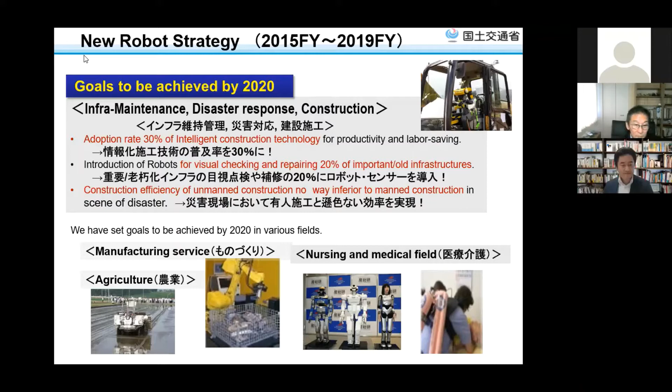In the new robot strategy, disaster response, inspection of infrastructures, and construction are set as 3 priority areas. Regarding disaster response, there are high expectations for the application of robots to activities under conditions where people are exposed to the threat of danger, such as earthquakes, volcanoes, floods, and landslides.

Unmanned construction has already been put into practical use. It is realized by machine control based on video communication technology and 3D blueprints. In addition, the introduction of robots in disaster fields, such as floods and volcanoes, is one of our priority areas.

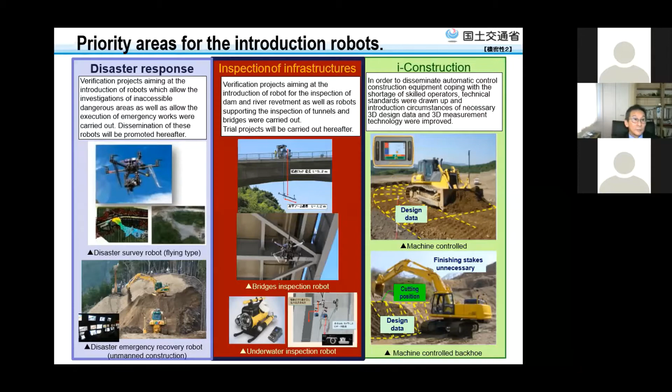As concrete goals to achieve this, for inspection robots, we will utilize robots for 20% of important infrastructure inspections. And for disaster response robots, we have set the target to realize construction efficiency which is not inferior compared to manned construction.

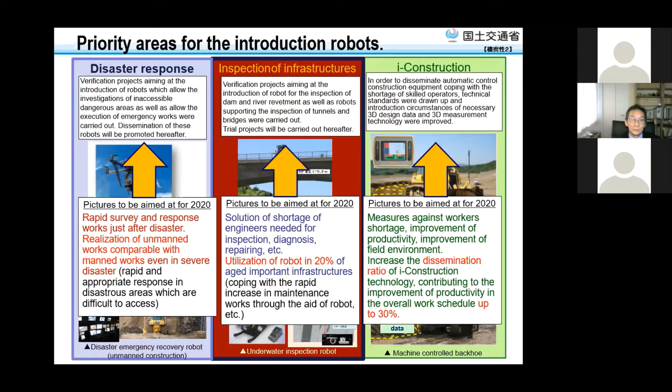The background to MLIT's strong promotion of the introduction of robots into public works projects is the existence of issues such as Japan being a disaster-prone country and labor shortage due to the aging of society. Furthermore, in order to overcome the labor shortage in the construction industry, there is an urgent need to improve the productivity and safety of construction work.

In particular, Japan is one of the most earthquake-prone countries in the world. There are 4 large plates around the Japanese archipelago. Many plate-type earthquakes occur, and volcanic activity is active.

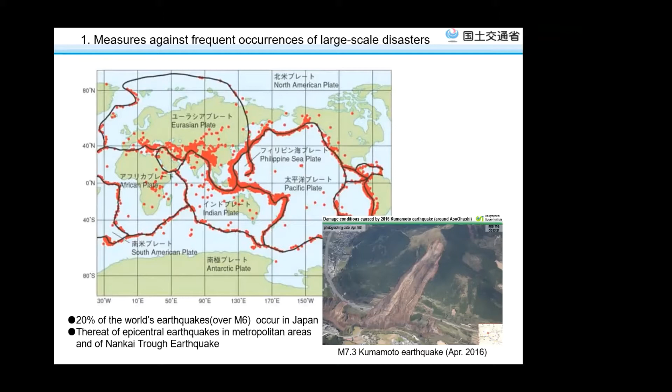The introduction of full-fledged unmanned construction technologies began with the restoration project after the volcanic eruption of Mount Unzen-Fugen in Kyushu in 1991.

During the eruption disaster, the removal of sediment that becomes a source of debris flows was urgently needed in the danger zone that might be reached by pyroclastic flows with a speed of over 100 km/h. For stone removal and erosion control works such as dozing, soil gathering, excavating, loading, and transportation, a technology was developed that implements construction by remote controlling heavy machine equipment with GPS using wireless communication.

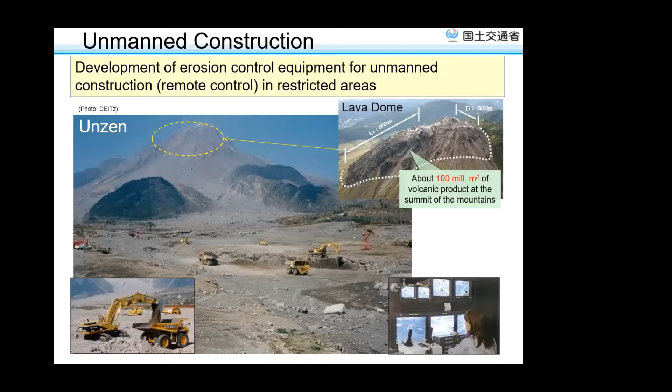Thanks to the decision to adopt these technologies, we could achieve the excavation of channels, the construction of concrete debris barriers, and installation of steel slits, all without human entering the construction site. Not only could we reduce the risk of debris flows and pyroclastic flows, but construction companies and equipment manufacturers could also gather experience and know-how, and unmanned construction technology progressed greatly.

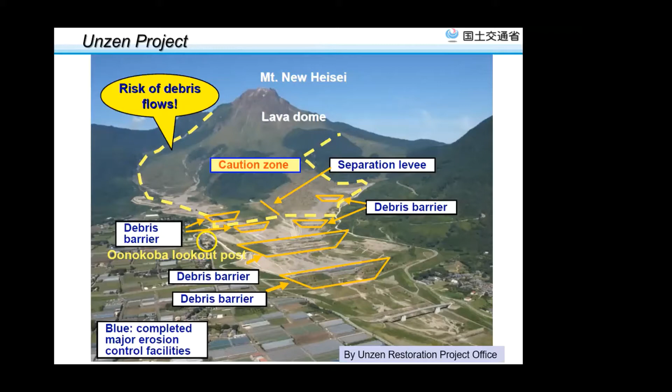At first, we started with radio control bulldozers, but now it has become possible to work from control rooms, which are more than 30 kilometers away from the construction site.

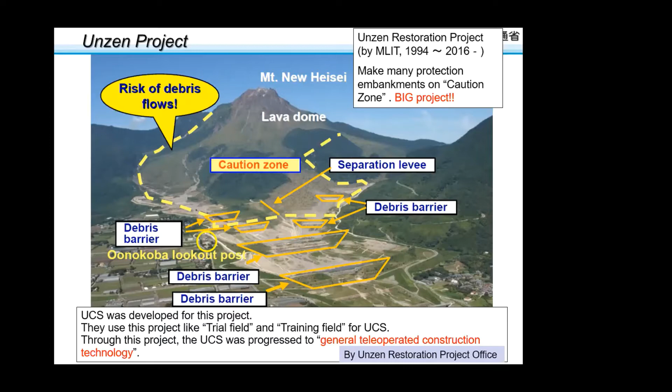Now, I want to give you a short introduction about UCS, Unmanned Construction System, with the most simple direct operation method. The operator conducts remote control at close range by direct visual observation. Operation distance is limited to a range of about 50 meters, at which visual observation is possible. This we call the first generation.

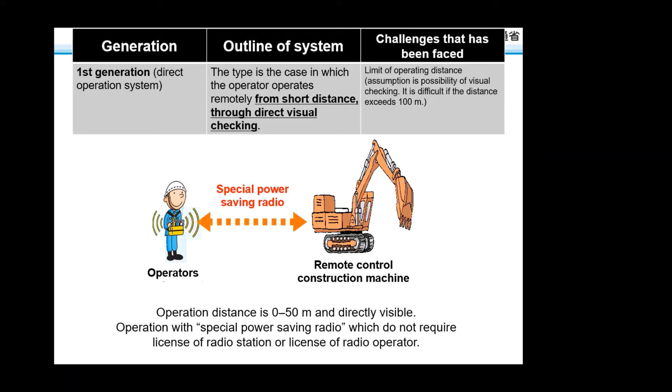The second generation is a method using a camera image, generally for a range of less than 300 meters. If you use a radio relay vehicle, you can conduct remote control up to a range of about 600 meters.

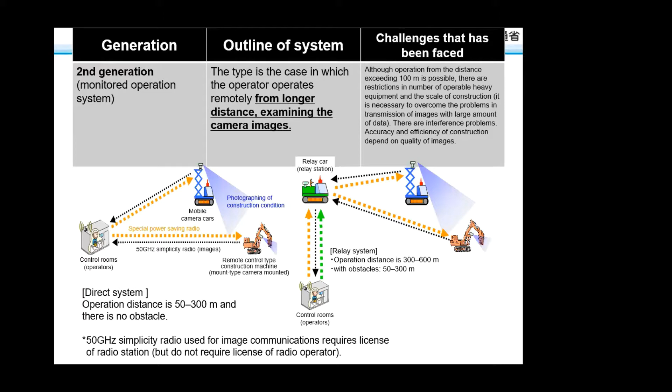Roller compacted concrete method, a leveling and compacting method using rollers, was introduced to build concrete dams with molds using gravel.

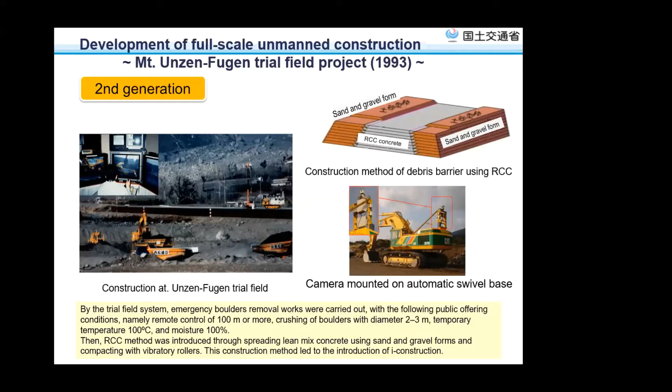In the Hakusan erosion control project, debris barrier construction work was conducted using a 50-ton suspension crane. All the construction work, such as earthwork, the setting up of the cylindrical mold block, concrete placing, compaction, and construction joint processing, were conducted by remote control.

Unmanned construction with the ISM method, in situ mixing method, which utilizes the gravel available on the construction site, was also conducted.

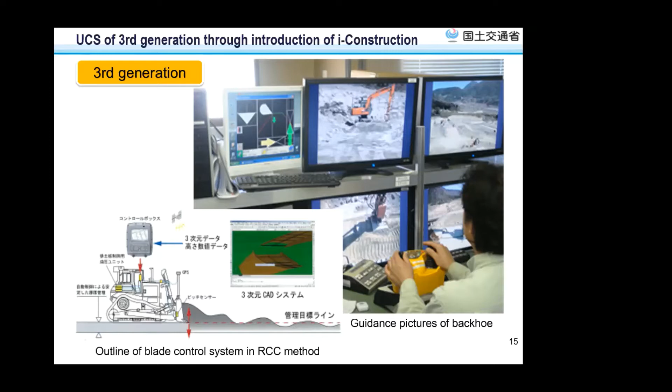With the third generation, we improve work efficiency by introducing machine guidance and machine control using design data.

UCS have evolved through actual disaster response since the volcanic eruption of Mount Usu in 2000. Their application in urban areas has been required, and remote construction from a long distance of more than 1 kilometer has become possible.

Since 2000, reconstruction work with greater accuracy has been realized thanks to progress of surveying technology, such as GPS, the piling of concrete blocks, and the construction of debris barriers using cylindrical molds.

In addition, since 2005, with the introduction of informatization construction, machine control has been used, and the efficiency of high precision construction has made further progress.

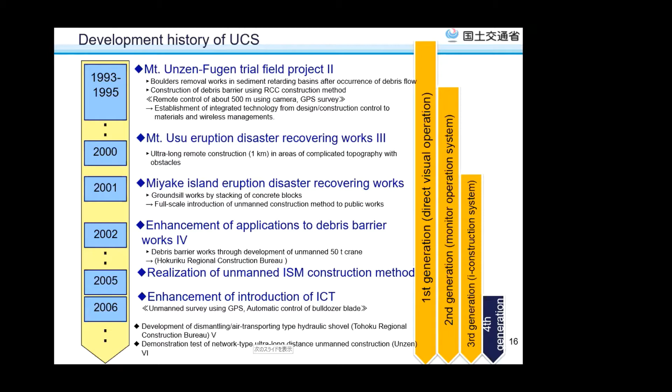With a fourth generation, by compressing and exchanging high volumes of high-definition image data through a communication network, remote control from ultra-long distance, more than 30 kilometers, has become possible.

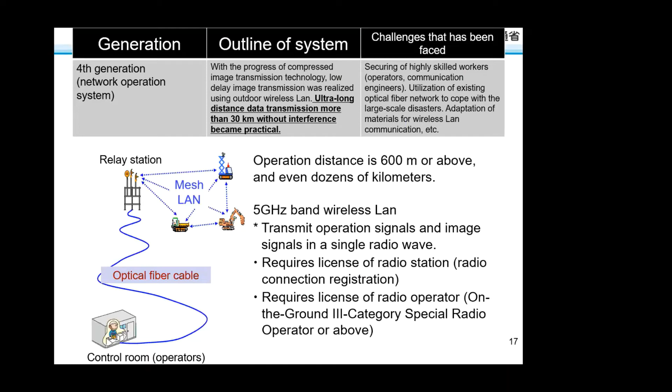Network type UCS was put to practical use through on-site validation at Mount Unzen in 2011. The installation of operation was carried out quickly in just 1 hour.

During this experiment, in addition to optical cable communication over the distance of 80 kilometers, a variety of communication methods such as satellite, mobile phone, TV radio waves, and long-range wireless LAN were applied.

Fourth generation UCS is said to be the future construction technology that utilizes information network and ICT. This picture shows UCS was introduced for work to remove the unstable debris at the top of part of a deep-seated landslide that had occurred in Nara Prefecture.

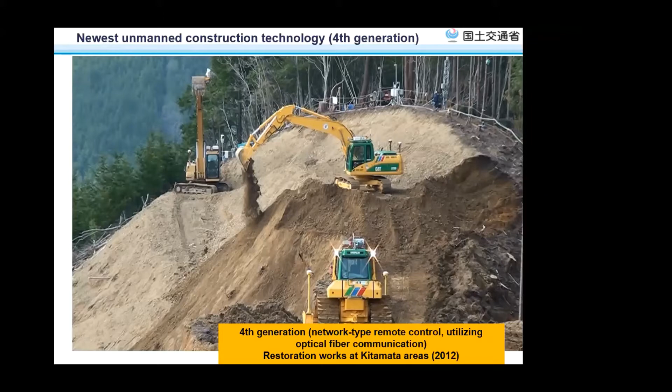From the operating room to the place near the site, optical fiber has been laid, and video and machine control data is communicated via wireless LAN.

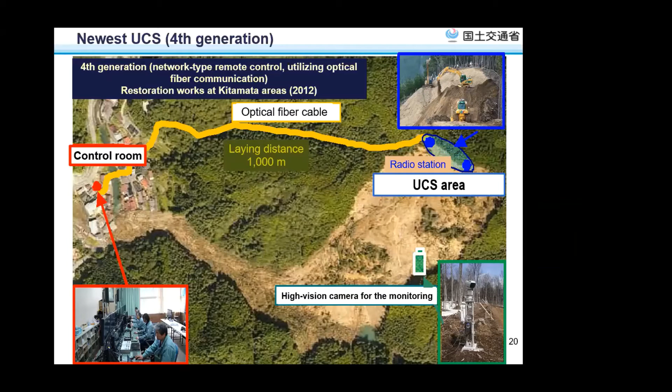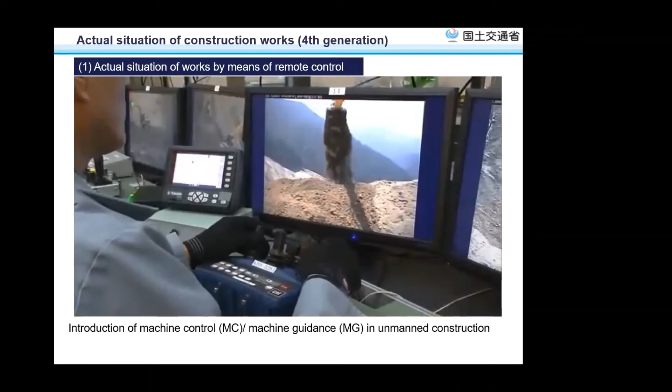By creating three-dimensional construction data, which combine design information with topographical information obtained in advance by aerial survey, safe and high-precision construction become possible.

In particular, as a blade is operating automatically, it has become possible for the operator to level to the design height by performing only forward and reverse operation.

This is work performed by machine control type bulldozer. The blade is automatically controlled. The operator can concentrate on performing the reverse and forward.

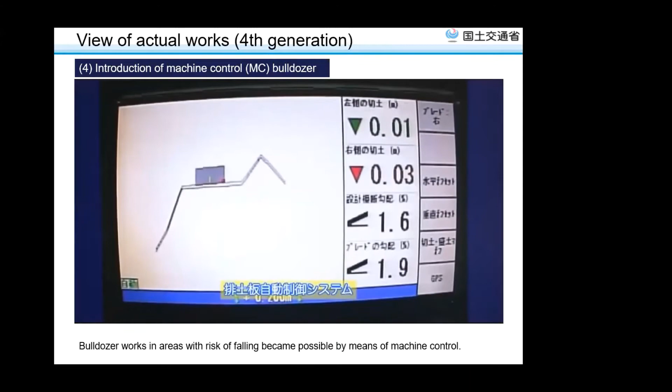In addition to the small camera image he is looking at, there is a small display. There, the excavation section, that is a work target, is displayed based on the three-dimensional design data.

There's an excavation section that is a work target displayed based on the three-dimensional design data. The numbers on the right show the difference between the design value and the blade height.

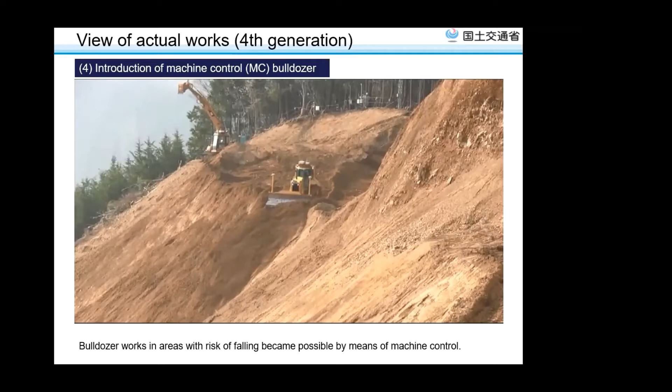Below that, designed gradient of the ground and the angle of the bulldozer blade are displayed.

In this construction, all machines are done by remote control. Also, remote control is not autonomous operations.

It should be noted that this is a dangerous area where a landslide may occur again due to aftershocks and that manned construction cannot be performed.

Our originality is to propose an effective new technology that can be used at the actual construction site to carry out construction in order to prevent the spread of damage in a dangerous area where people cannot enter.

And the construction was able to be completed by combining the technologies that can actually be applied. A specific example, we will introduce the realization of saving labor and becoming automatic control of crawler carrier and remote control excavator.

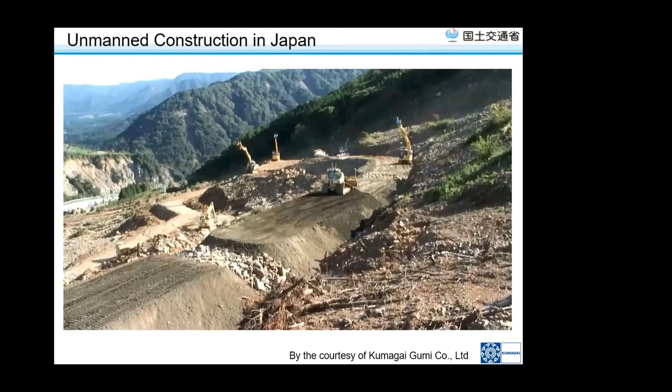55 people were killed and more than 180,000 people were evacuated from the Kumamoto earthquake.

About 8,300 houses were completely destroyed and 160,000 houses were damaged. The Aso Bridge collapsed due to the large-scale landslide caused by the earthquake.

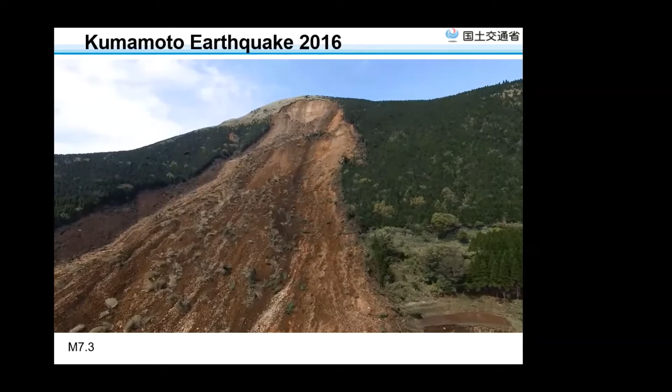This image is Kumamoto castle. You can see on the right hand there is a stone wall. This is a miracle, but it's a very dangerous situation.

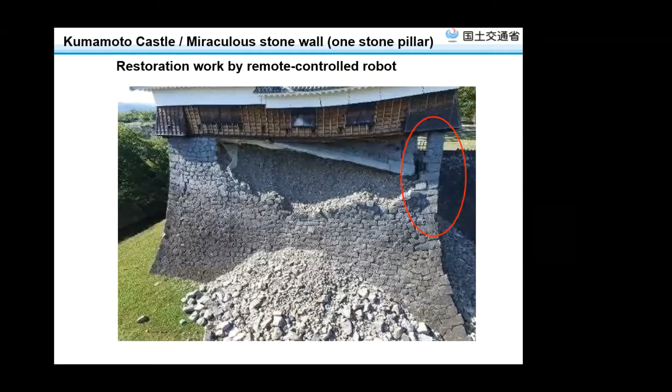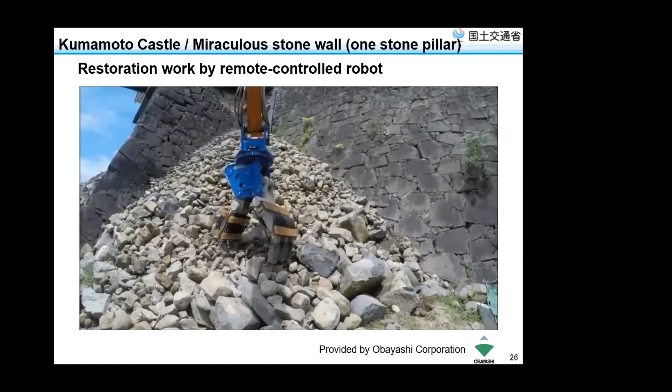A remote control unit called Surrogate, introduced by Obayashi Corporation, is used for this restoration work. To restore the stone wall, which is cultural property, it is necessary to collect each stone, walking directly under ishigaki, where there is a risk of collapse due to aftershocks.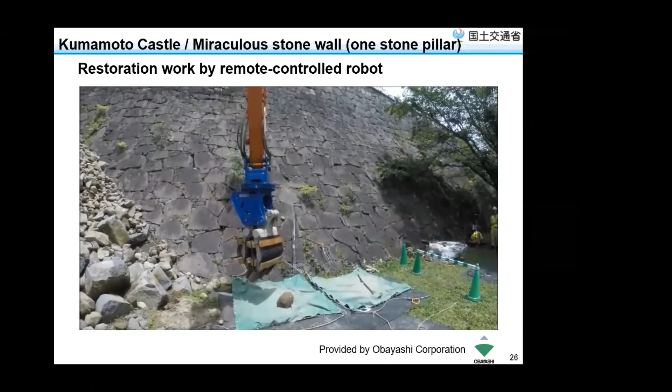It's extremely dangerous. The Surrogate system can be operated remotely by attaching a camera and a control device to an ordinary hydraulic excavator.

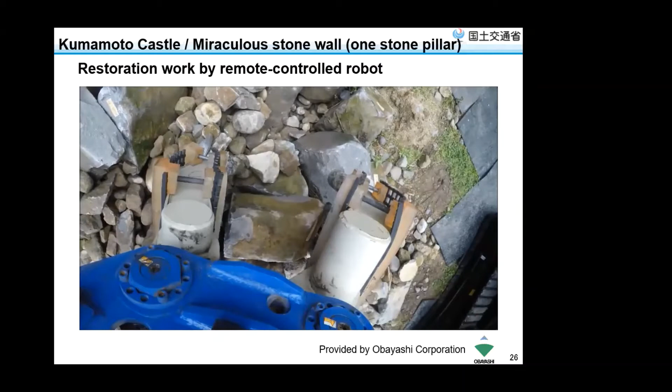This slide shows a river blockage which occurred in the areas affected by a magnitude 6.8 earthquake that occurred in October 2004. In this village, landslide caused a river blockage and the formation of landslide dams.

In this area, the great volume of damming sediment, pumping drainage with emergency drainage channels was carried out in a 24 hour operation in order to prevent a collapse of the dam by overflow.

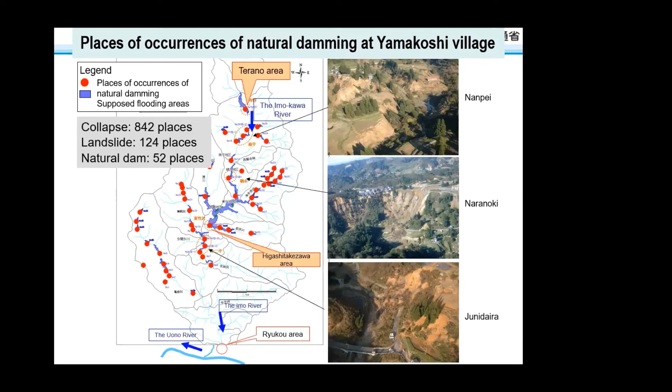This slide shows the natural dam almost overflowing, with a height of 31 meters. At this time, several landslide dams also occurred in this downstream area.

Because a water channel to prevent a collapse by the overflow had to be set quickly, UCS with its low efficiency was not applied, and water channel excavation was carried out with manned work under dangerous conditions.

Workers were working while being exposed to the danger of being hit by mudslide from upstream.

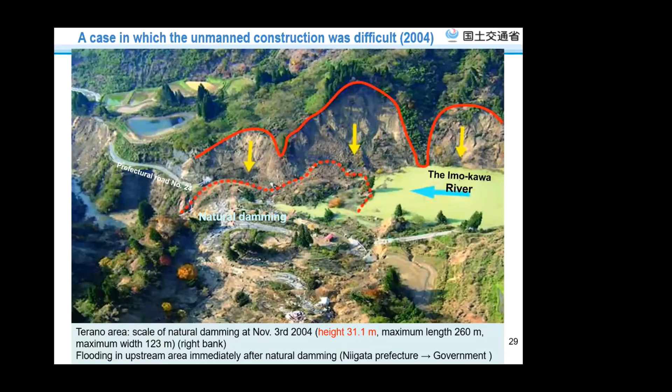This picture shows the dam from the previous slide, seen from the downstream side. Landslide sediment has been scoured by drainage.

In order to prevent collapse by scouring, the helicopter has dropped concrete blocks and ready mixed concrete. This was quite a dangerous situation.

This is a situation downstream. Due to the landslide dam, a vast dam lake has occurred. Here you can see the roof of submerged houses floating on the water. Quick response is required before the situation becomes like this.

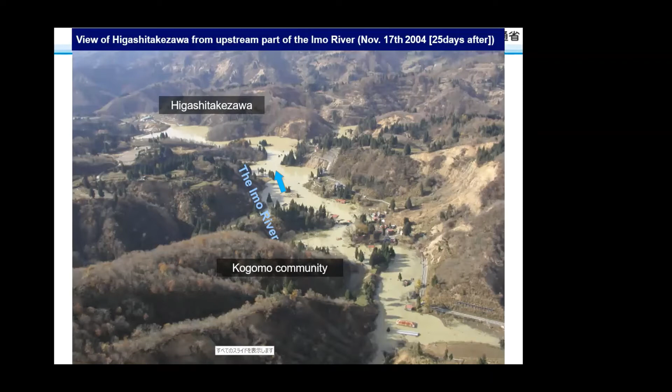What is the value of robots in public works? It is to realize the safety of people's lives and the economy. In the case of the natural dam mentioned earlier, if the UCS had started quickly and work efficiency was high, it may have been more effective in preventing the spread of damage. The technology has evolved somewhat, but further evolution is still required. Improving work efficiency is important.

In Japan, in order to foster this technology, we have adopted it for disaster restoration work activities. So far, UCS has been adopted at more than 150 sites, and it has given good results at landslide disaster sites all over Japan.

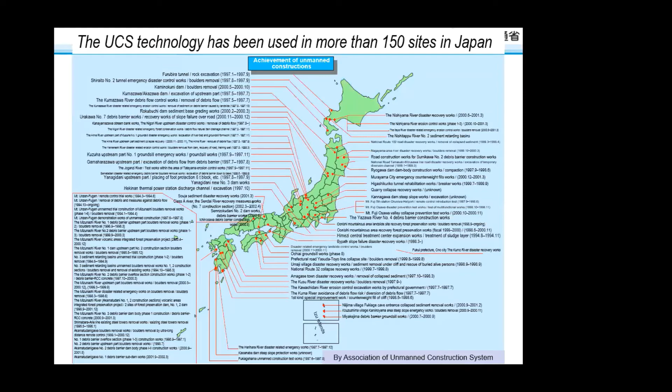We, MLIT, deploy a remote control type excavator in each regional bureau. In addition, these excavators can be disassembled so that air transport by helicopter becomes possible. The photo on the right shows a device called Robo-Q, which enables remote operation of a general purpose excavator by loading it onto the driver's seat.

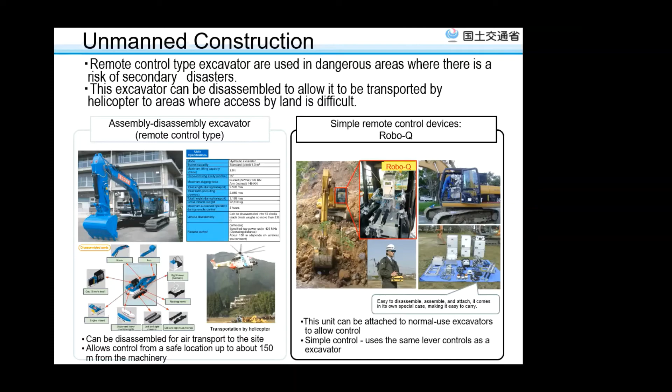PWRI is a national institute in the field of civil engineering. It is developing a ROS platform for ICT construction to promote further technological development of robots and software. We have already prototyped a remote controlled excavator and simulator support that support ROS.

This year, PWRI will set up a next generation unmanned construction test field using a 5G network in Tsukuba, Japan. We aim to contribute to development by various developers utilizing common rules.

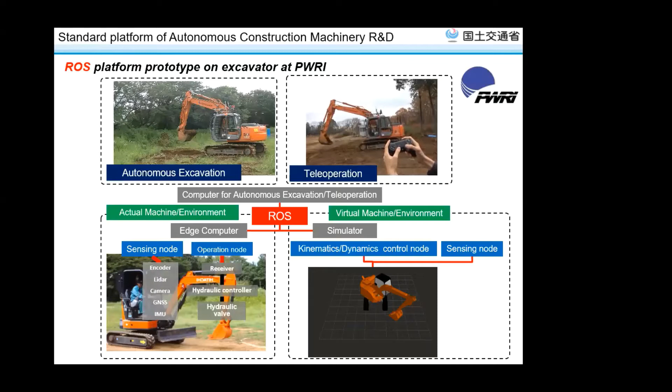Therefore, there is a need to enhance the productivity of the construction industry. I now mention the aging of social infrastructure in Japan. The total number of bridges is about 700,000 as of 2010. Those 15 meters or longer that were more than 50 years old accounted for 8% of the total. That percentage is expected to rise.

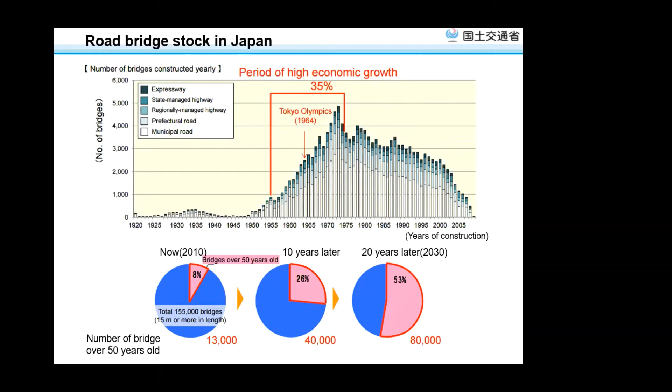to 53% in 2030. This picture shows the accident at a tunnel named Sasago Tunnel, where the roof slab collapsed over 130 meters on the expressway, and 9 persons died. Failure to implement a hammering test during periodic inspections was found to be the reason for the accident.

With this as a turning point, emergency inspections have been conducted on tunnels all over the country, and lots of problems were identified. This strengthens our conviction that consistent repair and improvement efforts are needed if social infrastructure is to be used over a long period of time.

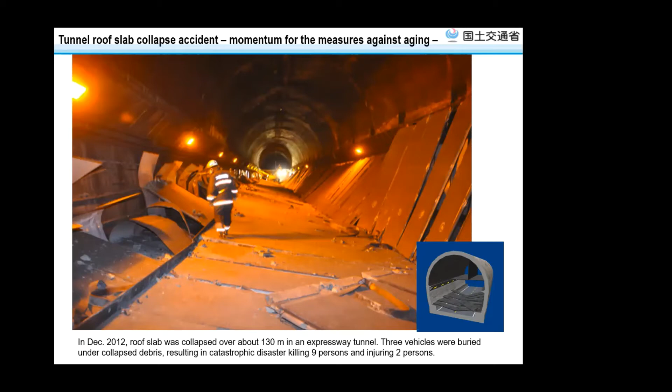This photo shows a diagonal member of a steel truss bridge broken due to corrosion. This bridge is Kisogawa Bridge, constructed 50 years ago. Identification of problems through inspection, and countermeasures for defects found such as cracks in welds, are becoming increasingly important. Our road law was revised in 2013 to make it mandatory to perform close-range visual inspection of tunnels and bridges every 5 years.

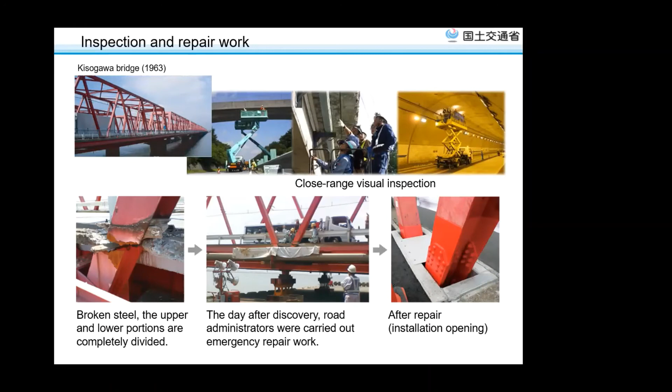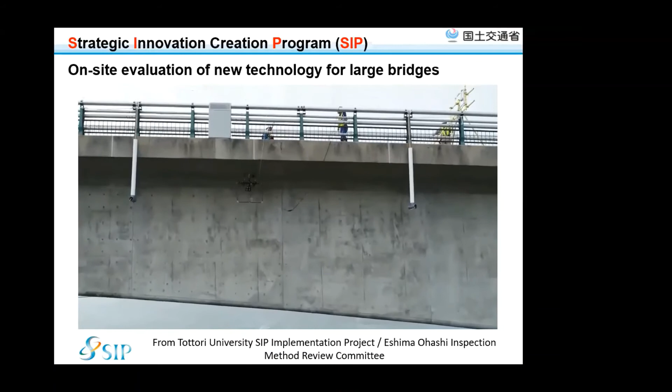Eshima-Ohashi is Japan's largest concrete bridge, with a total length of 1.7 kilometers and a height of 44 meters. It will be the third largest PC rigid frame structure bridge in the world. Since the slope of this bridge reaches 6%, it's difficult to inspect the bridge. It is very difficult to regulate alternate traffic, so the use of robots has been desired.

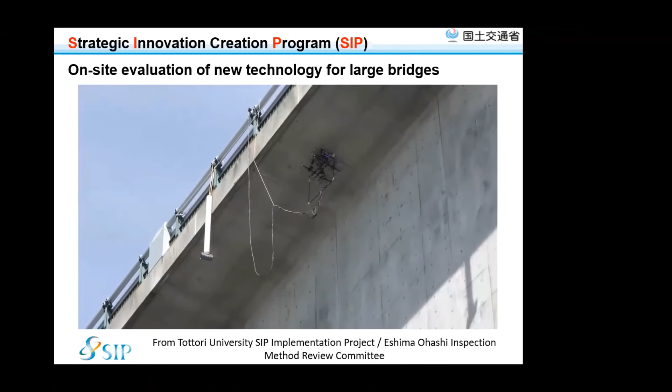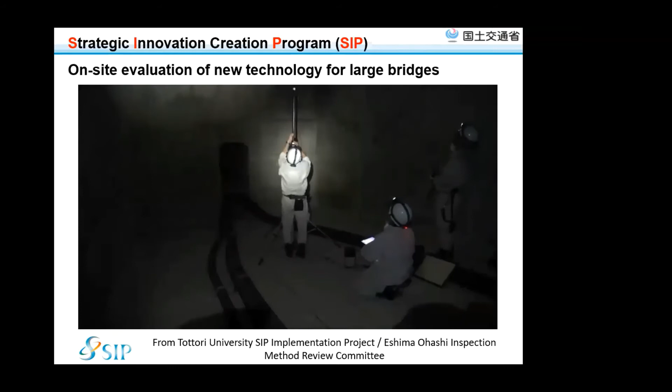At SIP, a Strategic Innovation Creation Program, we developed the bridge inspection robot and evaluated its ability to detect damage such as surface cracks. In this area, wind speed can reach up to 10 meters per second, so inspection of the girders required this ability.

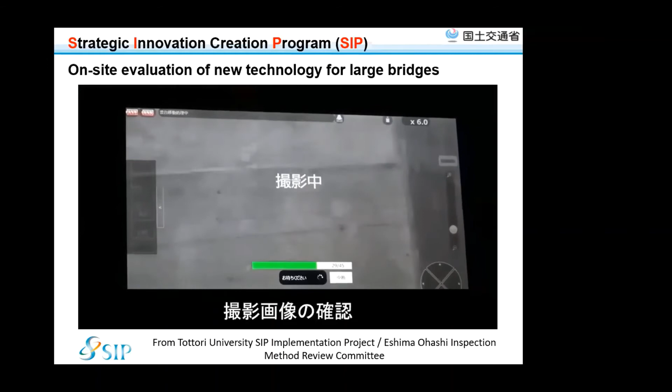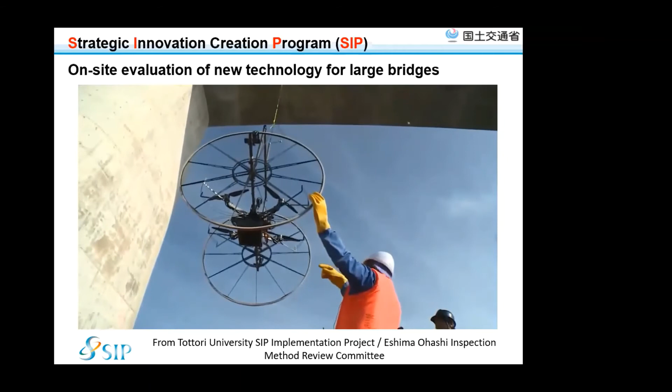Compare the size of the robot and the bridge. Imagine how large the civil engineering structure is, and how huge an amount of image data needs to be managed to detect cracks with a width as small as 0.2 millimeters.

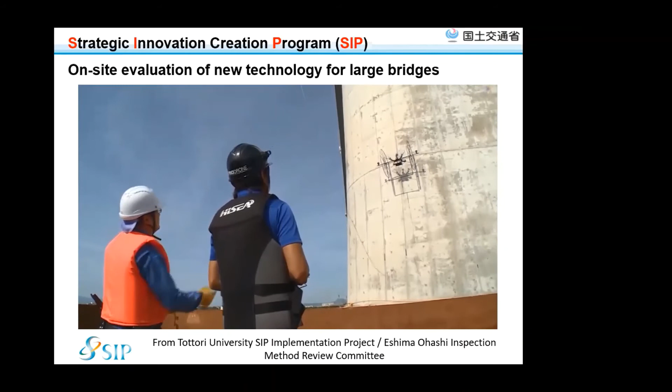So this robot was developed under the program of SIP.

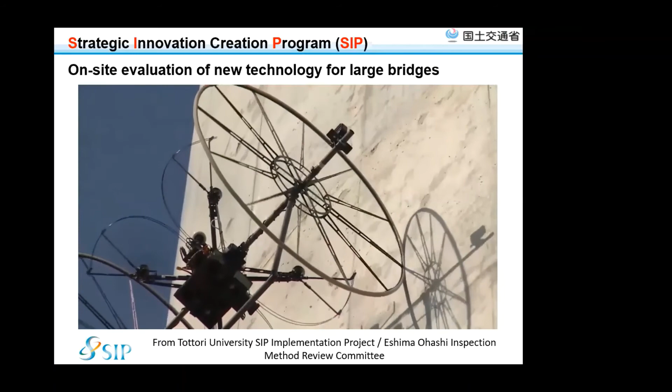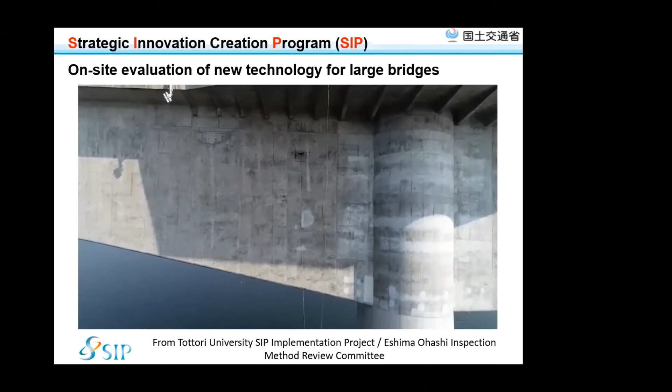We are promoting not only verification, but also technical development as a cross-ministerial project. We call it SIP, Strategic Innovation Promotion Program, a 5 year project. We intend to carry out the development of new technologies that will be needed in the near future. We will develop an environment favorable for the introduction of robot technologies.

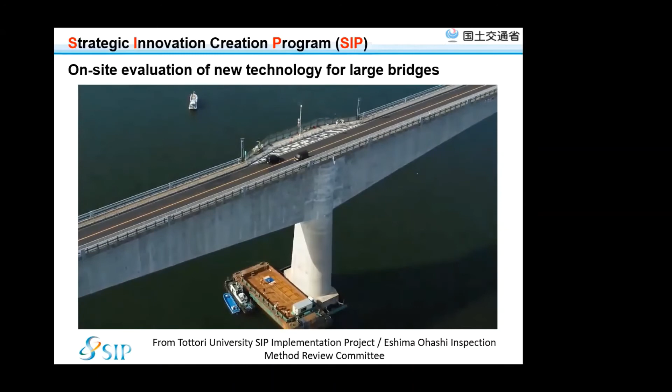For example, we are studying the structures most appropriate for robot inspections, and research and development work is being done on robot information markers.

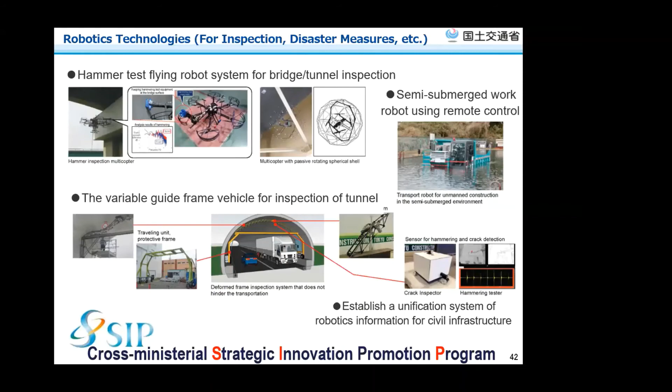Introducing the underwater heavy dump truck jointly developed by the government and private companies. This vehicle is a dump truck that weighs 10 tons and can run to the depth of 2 meters.

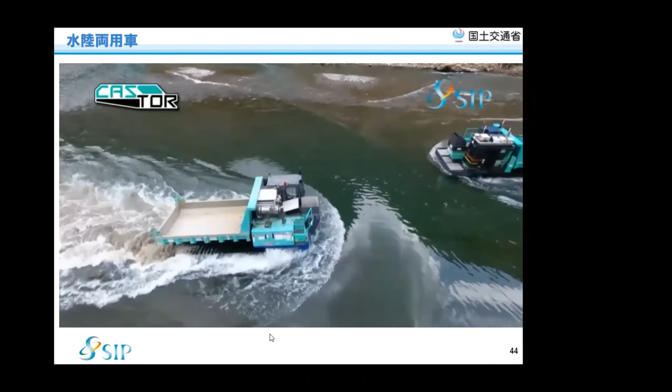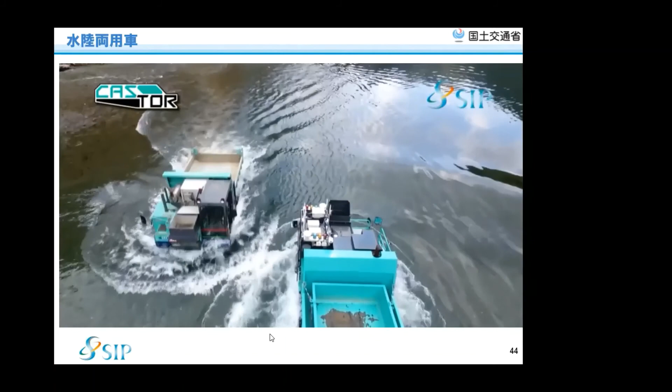In flooded Japan, this vehicle is useful for quick recovery work in flooded areas where ships with depths below 2 meters cannot be used. It is a remote controllable vehicle equipped with a non-contact underwater sensor that checks the underwater terrain to realize safe driving.

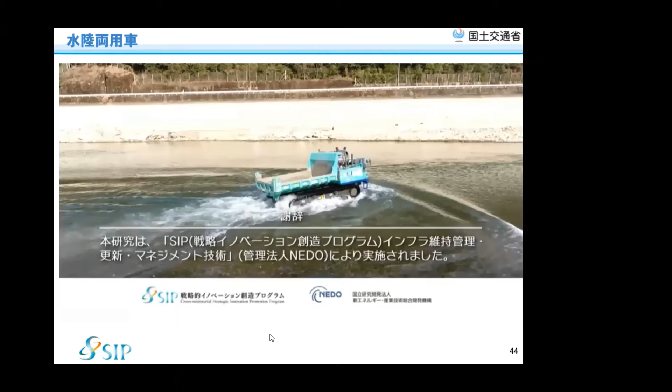This video demonstrates the riverbed excavation work on Kyushu's Kuma River. The river, with a maximum depth of 1.8 meters, was crossed 100 meters at a speed of 8 km per hour. It was confirmed that there was no problem with flow velocity of the river up to about 5 kilometers.

In the growth strategy, which is a budget guideline set by the Japanese government, the Ministry of Land, Infrastructure, Transport and Tourism strongly emphasizes productivity improvement in the infrastructure field. The goal is to increase construction site productivity by 25% by 2025.

To that end, we will introduce core technologies such as AI and robots to popularize ICT construction. We will also utilize BIM in public works projects by 2023. The government has declared these goals.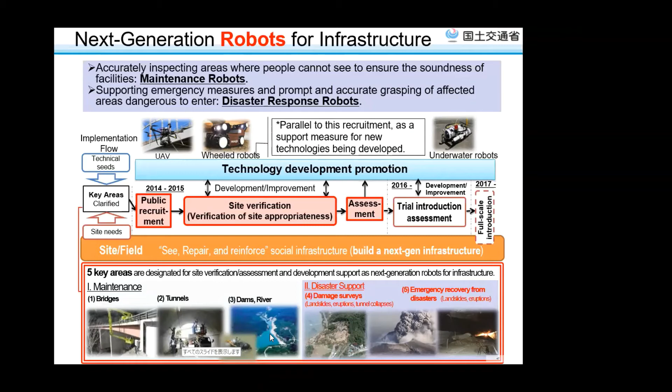So in order to quickly and efficiently carry out recovery work in this project, we implemented functional verification at the actual site. In addition to the 2 areas of damage surveys and emergency recovery, we designated a 3rd area of maintenance.

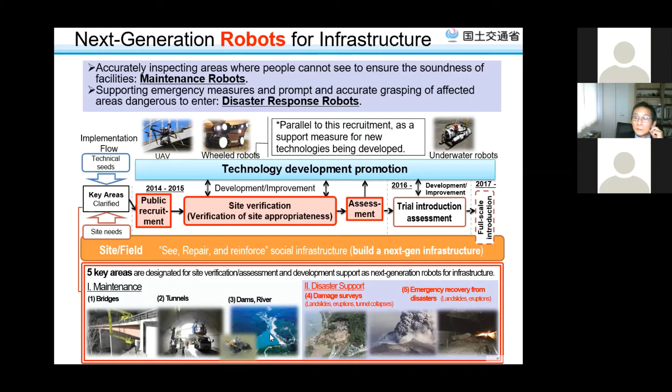As a result of on-site verification, we have been promoting the use of those technologies that obtained excellent evaluation. For on-site verification, we anticipate the collapse of tunnels, volcanic eruptions, landslides, and debris flows, and other disasters for which robots are expected to be utilized.

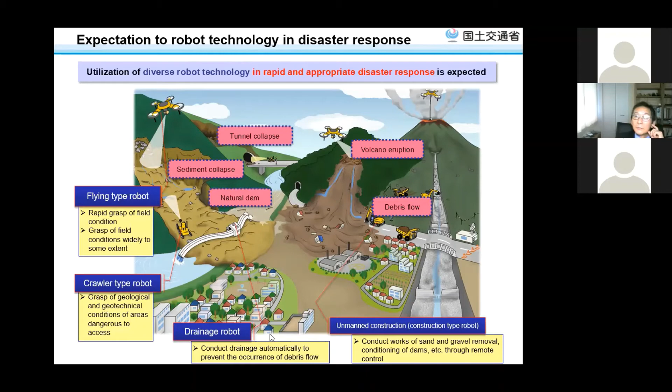As for the type of robot, we anticipate the use of flying type, crawler type, drainage robot, and construction robot. A total of 100 technologies were checked in on-site verification as providers responded to the public recruitment over a 2 year period.

Disaster survey robots include UAVs with laser scanners. The UAVs are capable of sampling volcanic ash. There are also robots with penetration tests, which are capable of surveying the bearing power of ground, and robots capable of surveying collapsed tunnels.

Among the emergency response robots are the autonomously controlled vibration roller and a mounted robot used for remote control of ordinary construction machinery.

In the first year, all of the applicants failed. But in the second year, the technology completed the investigation of 700 meters.

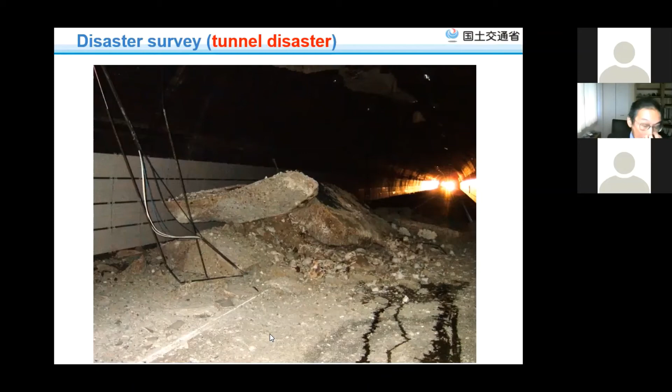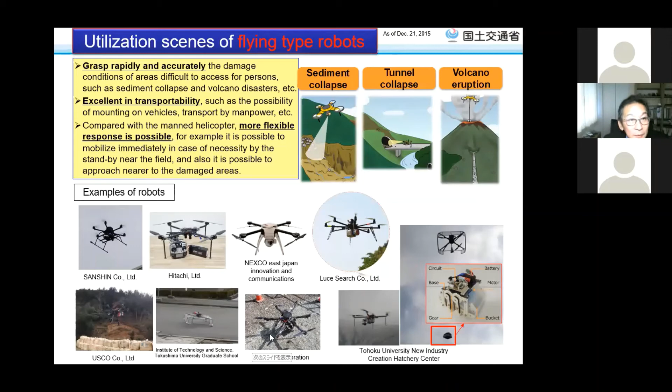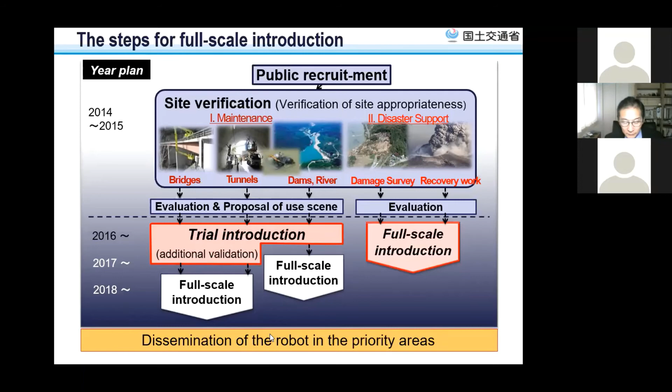In order to develop the deployment of inspection robots, we planned inspection procedures that can demonstrate the features of the robot, how to use the robot in the inspection, outcomes, how to organize the delivery method, and data that the robot acquires.

So now I'd like to mention the aim of the trial introduction of robots. The use of inspection robots in social infrastructure maintenance offers the merits of labor saving and keeping reproducible records.

For trial introduction, we'd like to propose not only robot operation procedures, but also the method used to deliver the inspection record. Data acquired by the robot is most valuable for infrastructure administrators.

The current inspection method depends on manpower. Only enlarged photos of detected damage are left available.

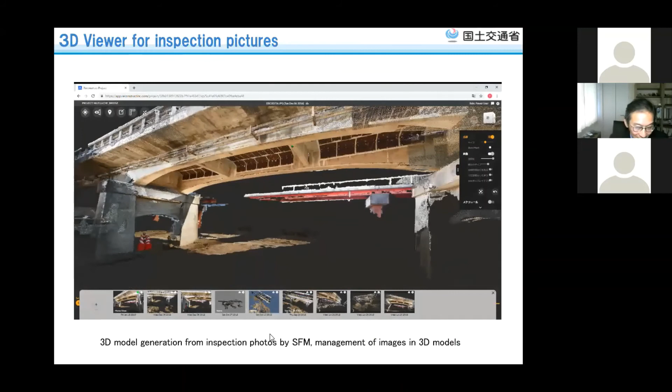As part of infrastructure DX, digital transformation, MLIT is promoting the introduction of BIM, CIM in order to improve the efficiency of design, construction, and maintenance cycles.

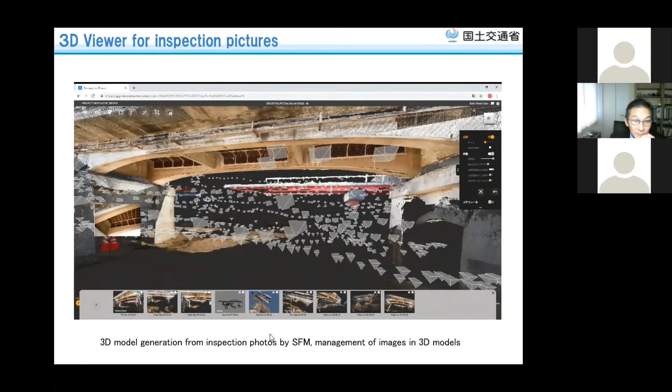In particular, we are working on a method to manage a large number of inspection images using a 3D model. This is an example of a 3D viewer of inspection images.

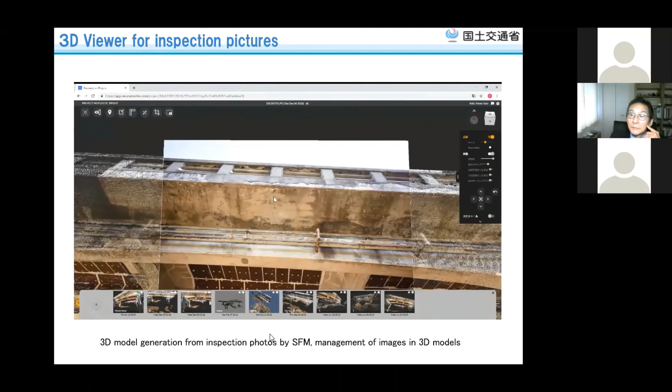It is a 3D model automatically generated from SFM from 1,000 photos taken by a UAV. The position and direction in which each picture was taken are expressed by a pyramid.

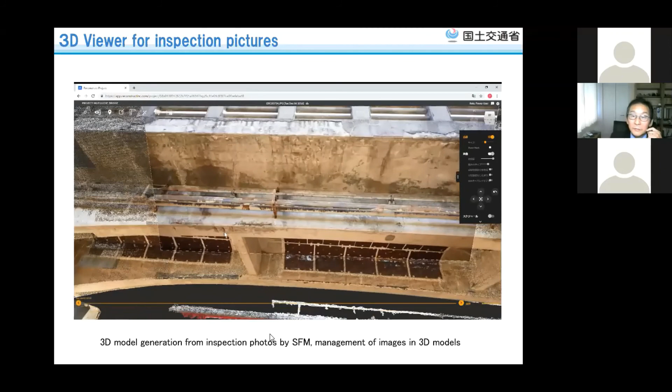Inspection pictures of large structures require a lot of time and cost to organize the location of damage. This technology is capable of automating that work. In the near future, photo management with 3D models is expected to become widespread.

MLIT has started developing a robot inspection business system using AI with private companies. Inspection robots, unlike people, get a large number of photos and videos, and AI can process this faster than people to decipher large amounts of image data from robots.

In order to improve the efficiency of robot inspection, we aim to achieve high detection efficiency by AI. Additionally, we will develop supervised data with input from experts, and we will promote the installation of an evaluation system.

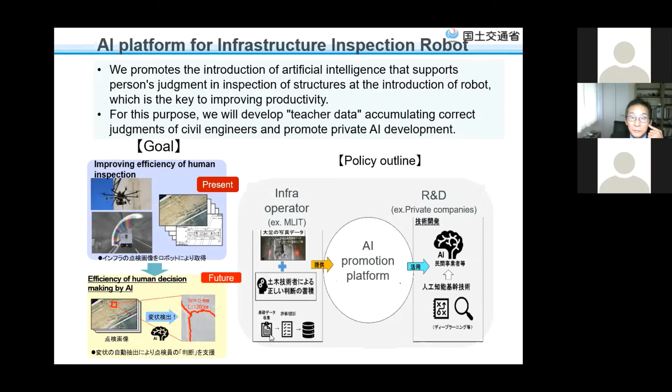We'd like to propose to the local government of Japan that manages huge bridges and tunnels to record and store inspection images in a 3D model. However, I think that in order to do so, we need a viewer that conforms to the form of the inspection report and the standardized inspection guidelines.

In addition, local governments and administrators in Japan think it's desirable to have the data in Japan because they are concerned that data will be lost due to some kind of trouble. I think that the operation form of putting the cloud server, which accumulates data, in Japan, and putting the program in the United States, is good. I think it's possible to propose an effective business model by preparing a viewer corresponding to the inspection business standard, with a download function for the generated data.

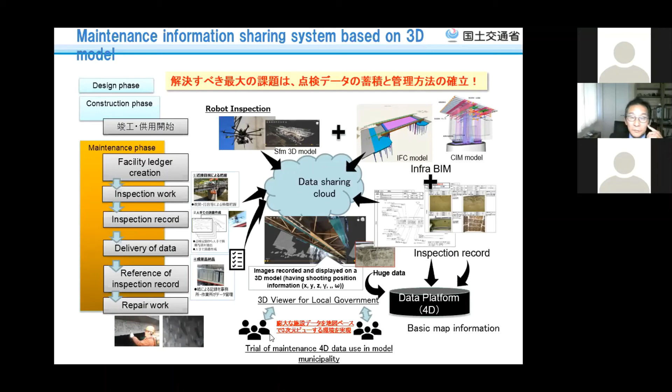We hope that ISARC will lead to energetic technology exchanges and the realization of excellent, rewarding business activity. Thank you very much, my speech is over.

Thank you so much. I think you have a lot of topics you'd like to introduce, but we're sorry we couldn't prepare enough time for your lecture. So I have a lot of questions. Dr. Nitta, do you see the chat board? Just a moment, please check the chat board. Do you see the long question from Dr. Borja García de Soto? He must move to the next session because he is the session chair, so I want to pick up this question.

Many of the remote operations you indicated heavily involve the problem of hacking between the machine and the operators. Do you understand? Some cyber attack, you mean? Yes, it's very important.